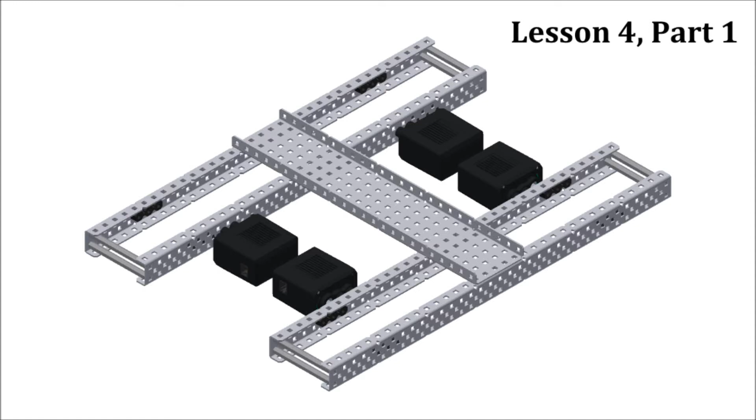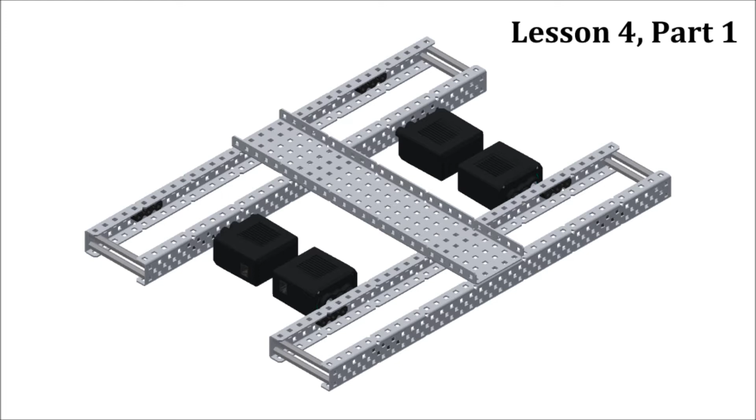Today we will be going over inserting bearing flats, motors, and axles. We will be primarily using the insert constraint along with a few mates, both of which were covered in previous videos. For reference, on screen right now is what your chassis should look like once you're done with this video.

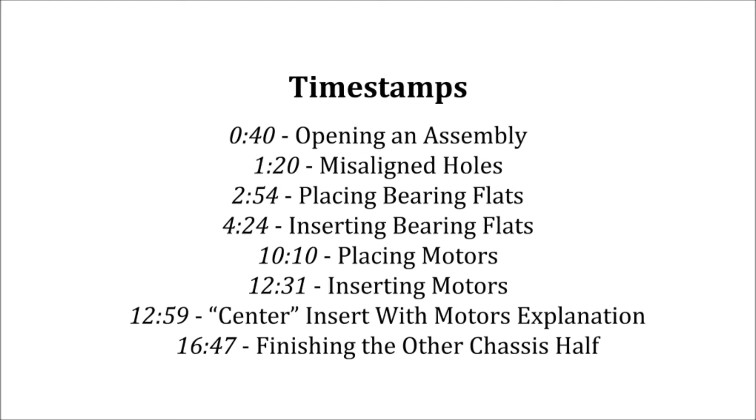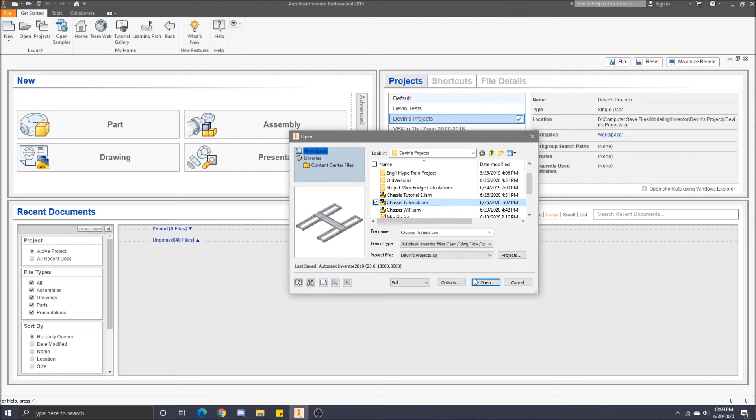Okay, so the first thing that we want to do is we want to open up the assembly that we made in the last two videos. If you remember how to do that, you can pause and do it right now. Okay, since we've gone over this many times before, I'll go through this quickly. But you go to the top left, press open. You navigate to where your chassis is. Mine is chassis tutorial.iam. And once you're done with that, simply press open.

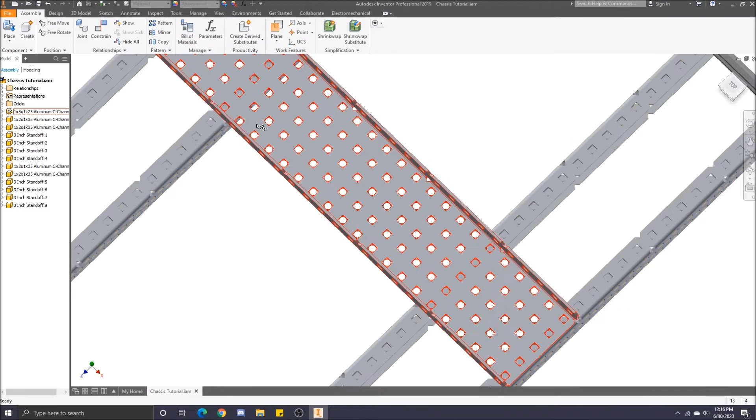And once your chassis opens, it should look something like this. So before we start adding any hardware to our chassis, I'm just going to go over a small little issue that you may or may not have noticed. So if you zoom in to where the inner C channel connects with the center 5 wide C channel, you'll notice that the holes actually don't align. In real life, these would align probably perfectly.

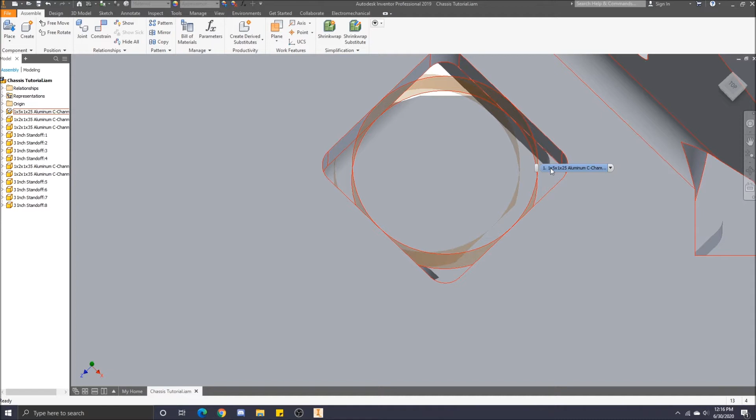However, in CAD, because we don't have wiggle room and imperfect tolerances, the exact dimensions don't add up to line up with the holes. In real life, this would be fine because screws have wiggle room and the parts aren't created perfectly anyway. But because this is CAD and everything is perfectly dimensioned, we will get these little offsets.

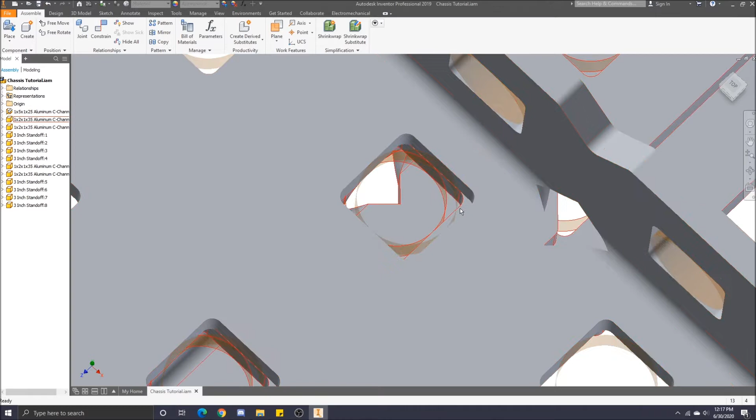Just kind of as a rule of thumb, if it looks like you could theoretically insert a screw in it and it's not too offset, it means you're good and you can put a screw through it. However, if this were like covering half the hole, then that's something you have to watch out for and you probably can't put a screw in it. But for this case, because they're almost close enough, it's okay. Now that that issue is out of the way, we can move on to continuing our CAD model.

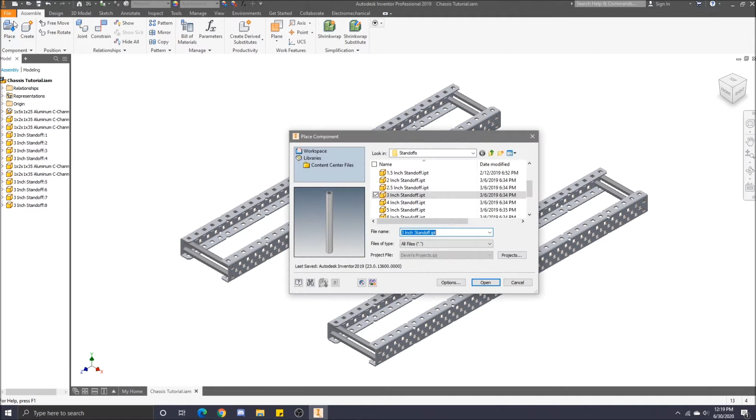The next thing we're going to do is place down 4 bearing flats. Since you should be accustomed to placing parts, I won't go over it slowly, and if you are comfortable with navigating the part library, I'd encourage you to find the bearing flats right now. I'll pause shortly so you can pause the video and search for 4 bearing flats. Okay, so as usual, we will navigate to the place button in the top left, press it, and we will navigate outside of the standoffs folder and outside of the structure folder. So we are back in the Devin Ho's part library folder as seen on the top.

And because this is an axle part that is used with motion, we will go under motion, and then we will look under shaft hardware because this is hardware that you use on the shafts. And then it should be the third thing on screen, bearing flat. Just click that, press open, and then we're going to click 4 times in an empty area to place down 4 bearing flats, and then press escape.

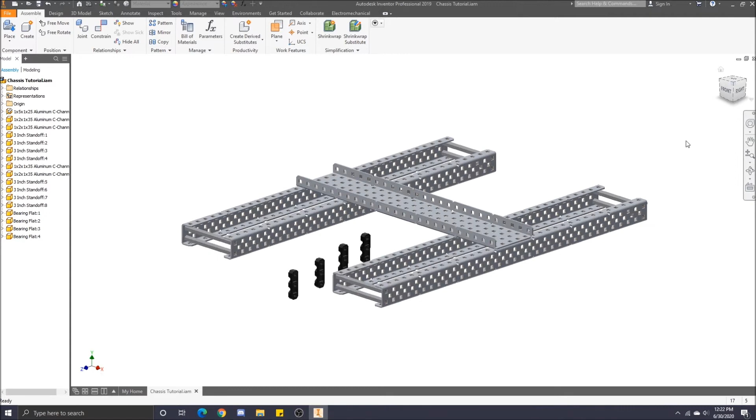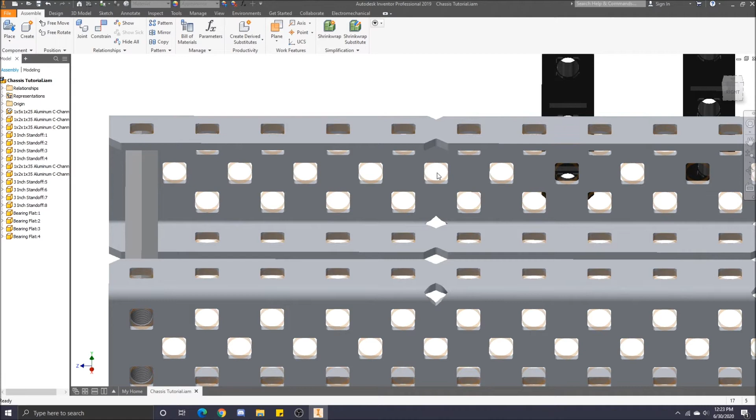Okay, so the next thing that we are going to do is we are going to insert the bearing flats onto the C channel. So we want these bearing flats to go on the inside part of the C on the 5th hole from the middle. So in other words, let me just move my camera. We want the bearing flats to start on this hole that I'm circling right now, or the 1, 2, 3, 4, 5th hole. And then it'll extend to the 6th and the 7th hole, relative to the left. It'll be the same on the right, except you're going from the right.

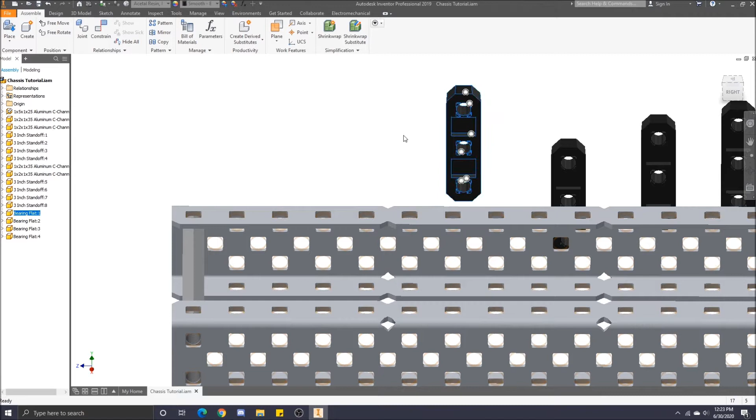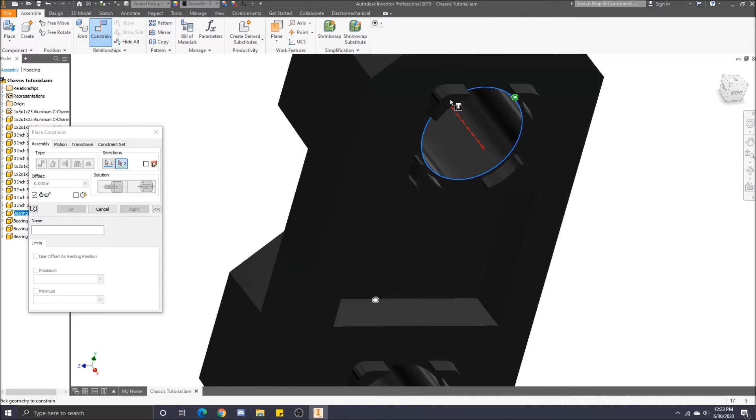So just like standoffs, bearing flats have iMates. So it's the exact same process as the standoffs. What you need to do is you need to click the bearing flat, go to constrain, again select the insert tool. We will select the correct iMate. Make sure that it's the one on the correct side of the bearing flat. In this case, it should have these little 4 notches that go into the C channel. And then we select the correct edge on the work feature. It'll snap in place, and then you press OK.

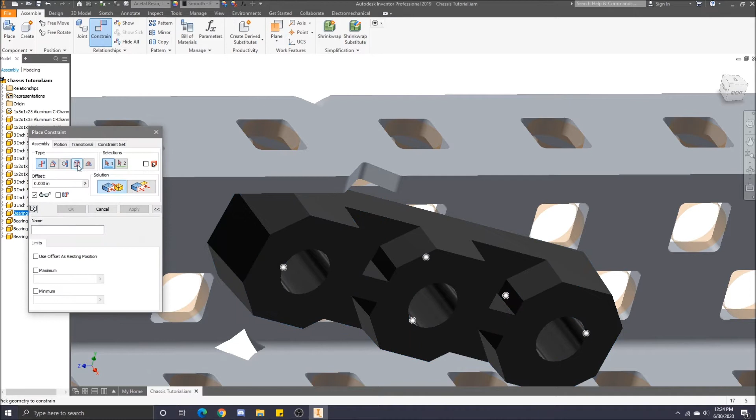And then I'm just gonna move this over so I can repeat the process again. I'll zoom into the location, press the bearing flat, press constrain, insert. I'll select the correct iMate and select the work feature and press OK. And there we have it. We have our first bearing flat.

So with the remaining bearing flats, they will go in the exact same position relative to their edges. In other words, they will go on the 5th, 6th, and 7th hole from the left or the right, depending on which side of the chassis you are. If you are comfortable with inserting the bearing flats, you can pause the video right now and try it for yourself.

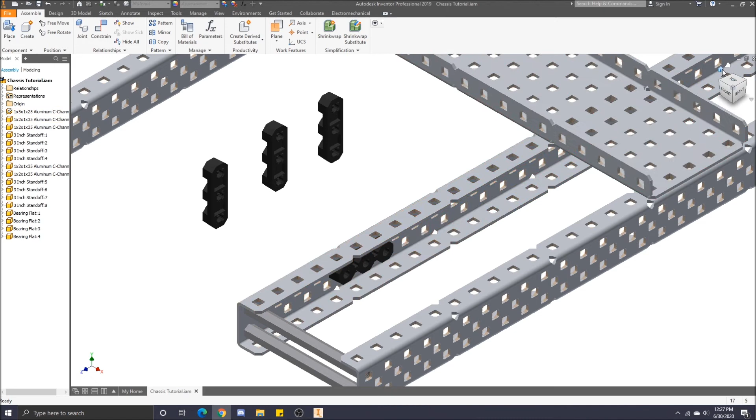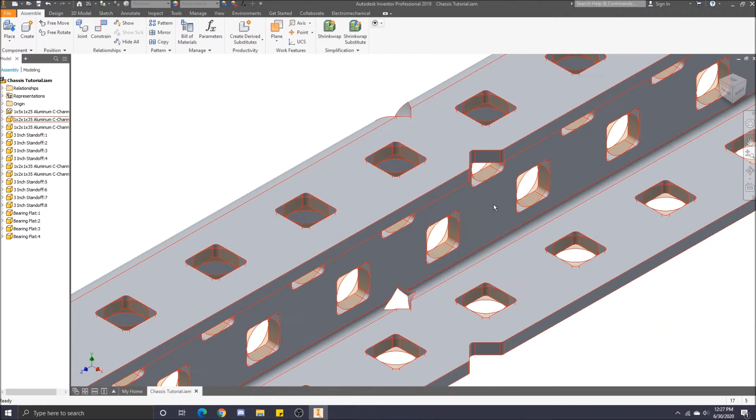Okay, so to insert the other bearing flats, I'm going to start with this C channel. So the first thing I'm going to do is press the home button and then click and drag these to the other side just so it's easier for me to see. And then once we do that, I'm going to hover my mouse over the location I want to zoom in onto and then just zoom into the location. And then I'll slightly adjust my camera angle with the cube, and I have to zoom out again because it's too close. And then I'll just pan a little bit so I can see things better.

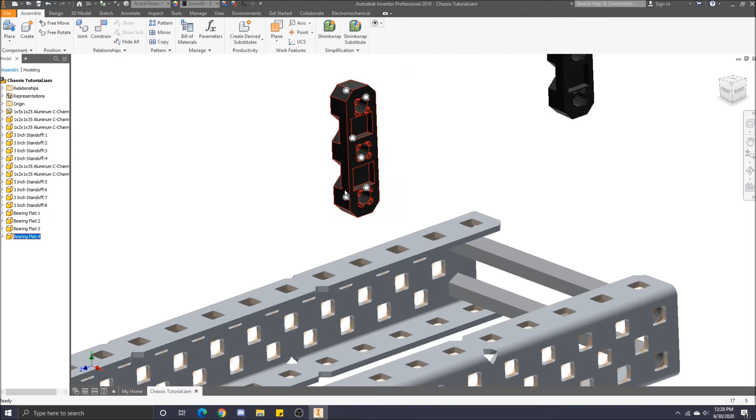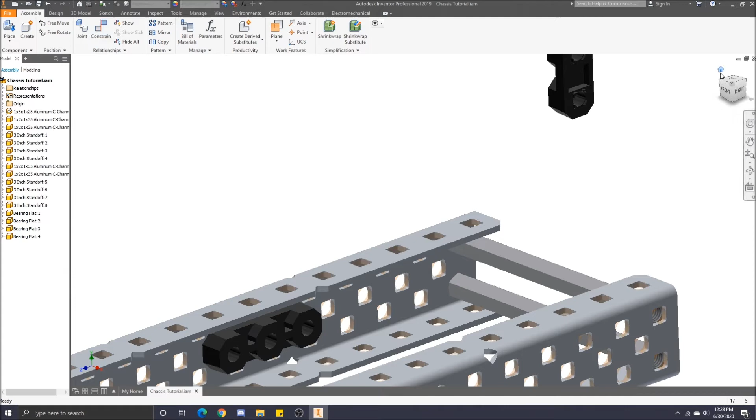And once again, it's the same process. You click the bearing flat, click constrain, click insert, select the iMate, select the correct hole, and then press OK. And we're going to do this again. We're going to select the bearing flat, press constrain, insert, iMate, work feature. OK. And then repeat the process with the other ones. And make sure it's on the correct hole. Again, see from the right side, 1, 2, 3, 4, number 5, number 6, number 7.

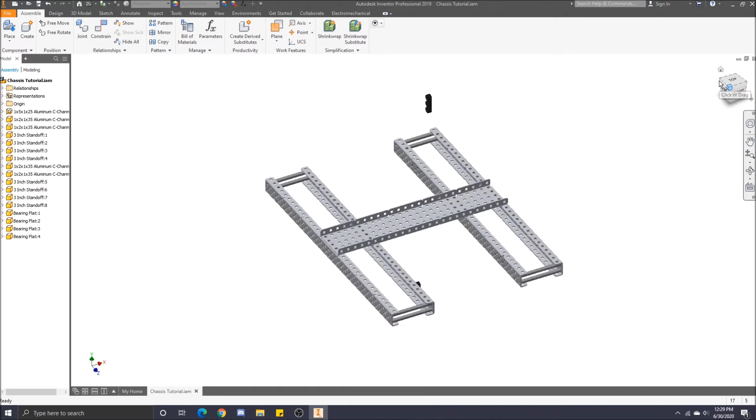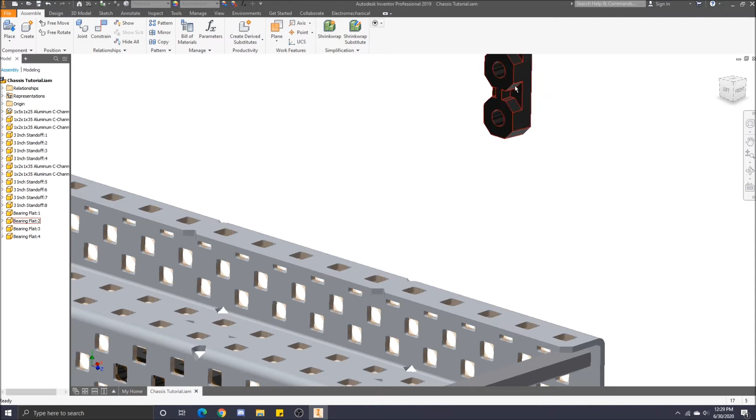So I'm going to go back to home. I'm going to use the cube to go to the other corner. I'm going to click and drag this bearing flat into a better location. I will zoom in to the location, readjust my camera, pan a little bit, and zoom out to see everything. Press escape, and once again, click the bearing flat, constrain, insert, iMate, C channel. Okay. Bearing flat, constrain, insert, iMate, C channel.

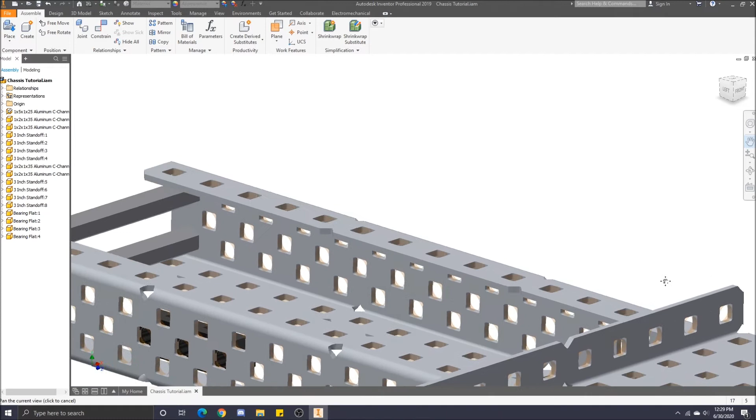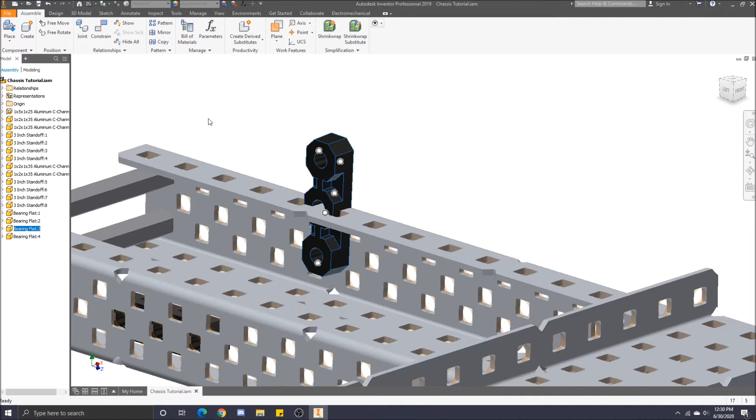Okay. And then same with the other side, I'm just using the pan tool to get to the other side. Going to click the bearing flat, constrain, insert, iMate, C channel. Okay. This time I'm just gonna rotate this so I can see it and pan the camera once again. Bearing flat, constrain, insert, iMate, C channel. Okay. And there we have it. We have the 4 bearing flats in place.

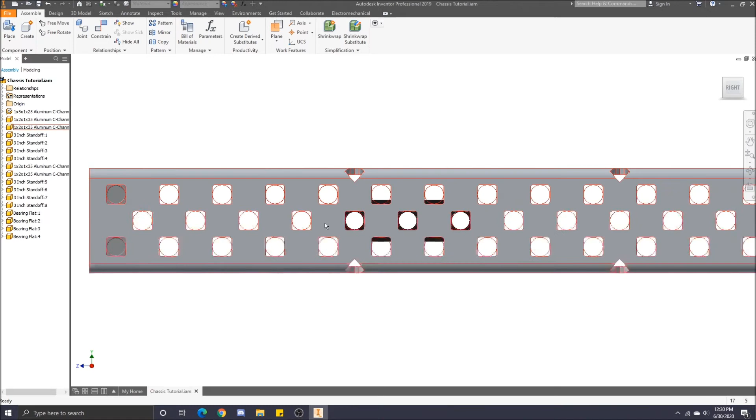I'm just going to go to the right side and just check to make sure they are on the 5th hole in the center. 1, 2, 3, 4, 5, and that's both of them. Going to the other side. 1, 2, 3, 4, 5, and that's both of them, and that is correct. So I go back to home, and we are ready to move on to the next step.

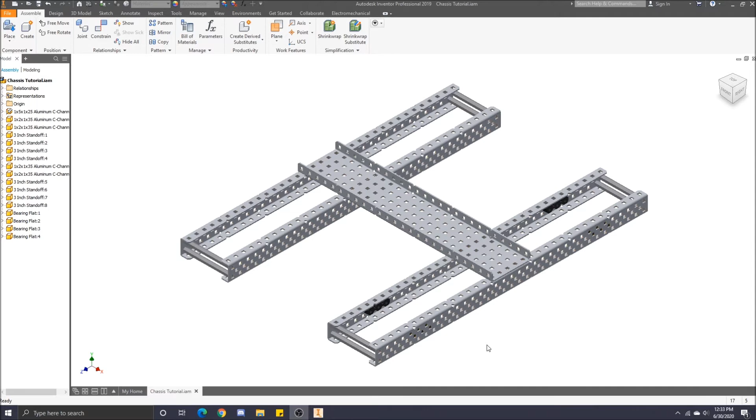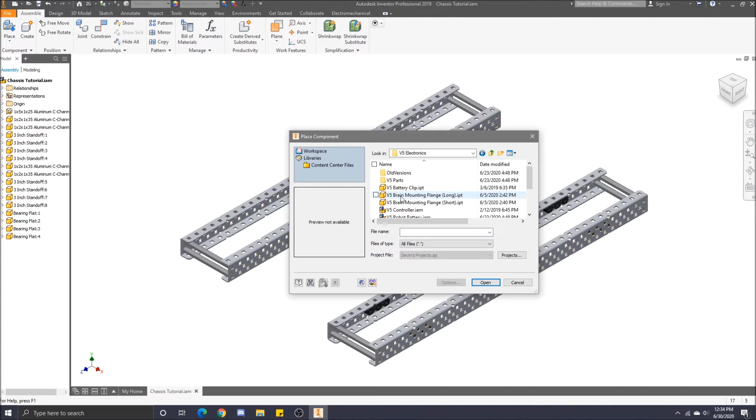Okay, so the next thing we are going to do is insert two V5 smart motors into our assembly. If you remember how to place parts and are comfortable with navigating the part library, please pause right now and do it for yourself. Okay, so once again, we are going to go to place. We are in shaft hardware, so we actually want to go out of shaft hardware and out of motion. If you scroll down, within the VEX part library, there's a folder specifically for V5 electronics. Go into it, and then if you scroll down, there is a V5 smart motor towards the middle, the bottom.

Click it, press open, select two places on the screen. I'm going to put it right here near the front and right here near the back so I don't have to drag it. Once I'm done, press escape, and we have the V5 motors in our assembly. So if you noticed when clicking the motors, you will have seen some iMates. Yes, there are a lot of iMates in this CAD library, so this should be easy for you.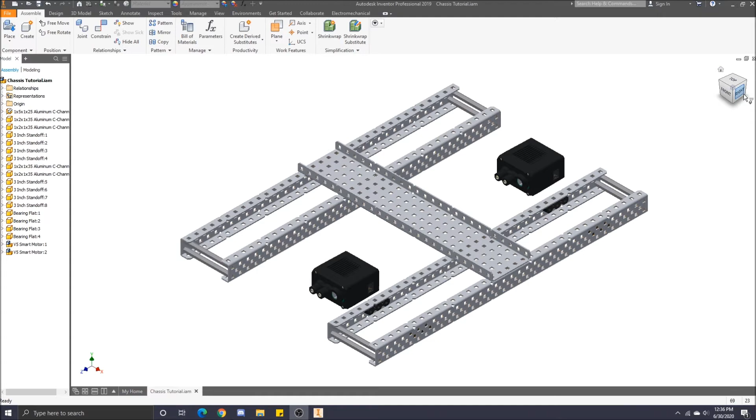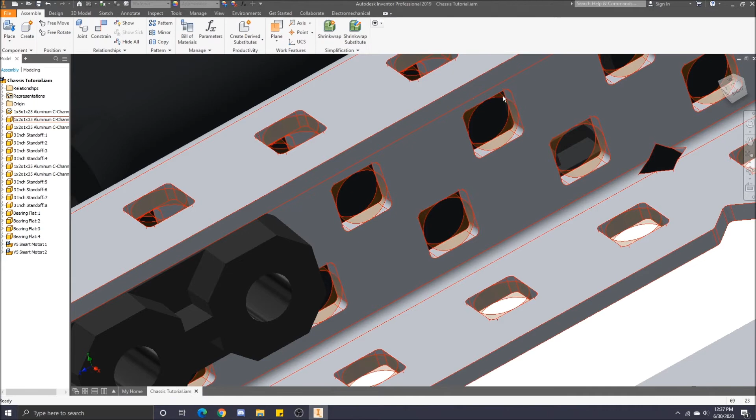So in this case, we want the motors to be inserted on the 8th and 9th hole of the C channel. So remember, the bearing flat is on the 5th, 6th, 7th. We want these two prongs to be on the 8th hole that I'm circling right now and the 9th hole that I'm circling right now. However, we also want to make sure that the axle is going through the bearing flat. So we will have to strategically insert these together. If you are comfortable with inserting and creating iMates, you can pause the video right now and do it for yourself.

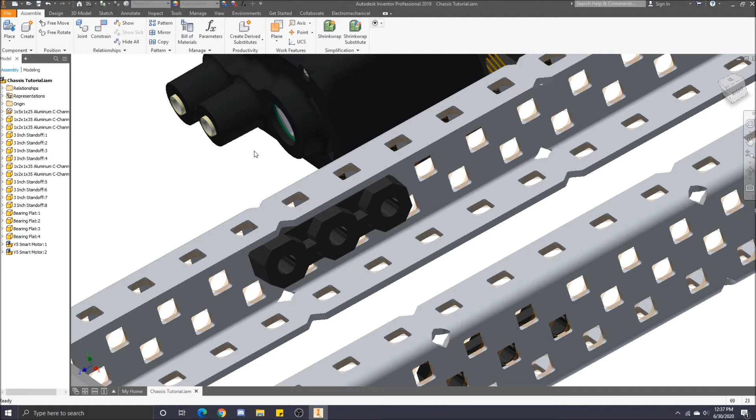Okay, so what we're going to do, just like the bearing flats and the standoffs, is we are going to click the motor. You will see that the two iMates appear. Press constrain. The first thing we are going to do is we are going to insert the middle, in quotes, the middle prong. The reason I call this the middle is because it's in between the axle hole and the other insert. This means that we can use this as like the center point and then rotate the motor around it. So in this case, I want to put it on the 8th hole.

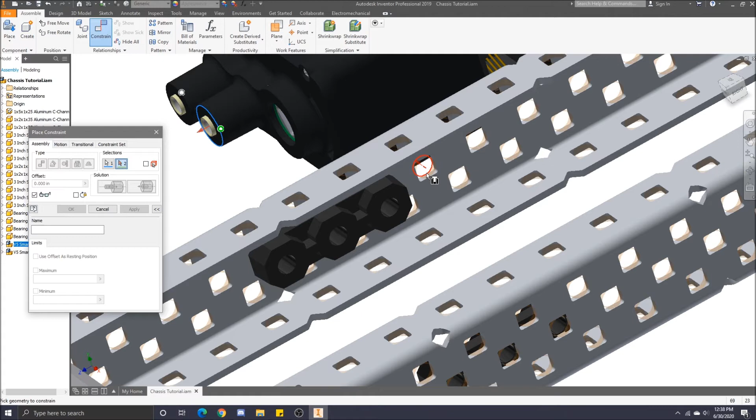Make sure I select the right side of the C channel, or the one that's facing out. Click it, and then press OK. So you'll notice that because I selected the center insert on the motor, I can now rotate the other insert into the correct location and the axle hole into the correct location.

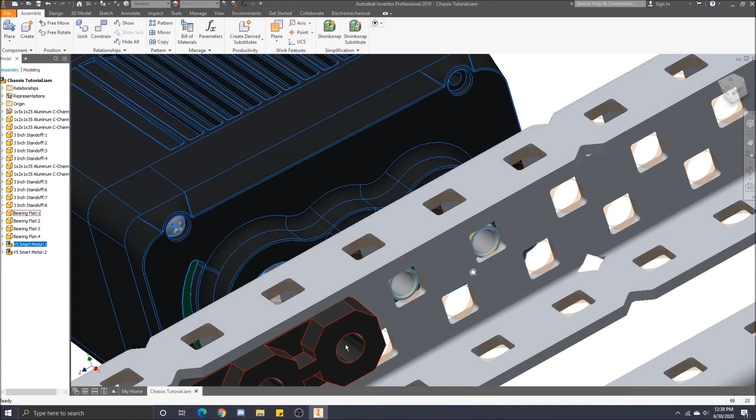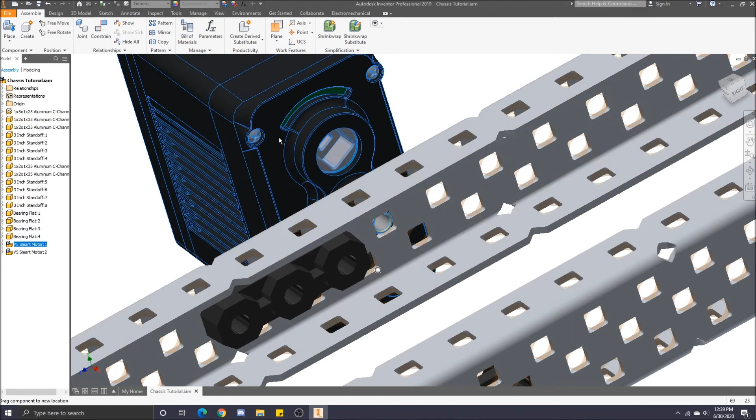When inserting motors, because we know that motors are 3 holes wide in terms of the axles and the inserts, if we get the center correct, if, like how it was last time, the axle is in the incorrect location, we can just pivot around the center because it's the center. Which is why whenever I'm inserting motors, I always start with the middle.

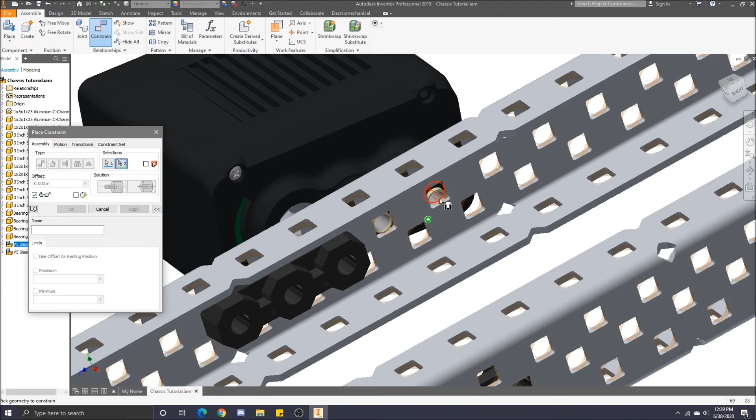So once we get that, we are going to click the motor again to make the iMate show up. Gonna press constrain again, gonna press insert, press the iMate, and then select the correct edge on the C channel, and press OK. And then you should notice, if you move around, that the motor is inserted into the correct holes, and the axle is indeed going through the bearing flat.

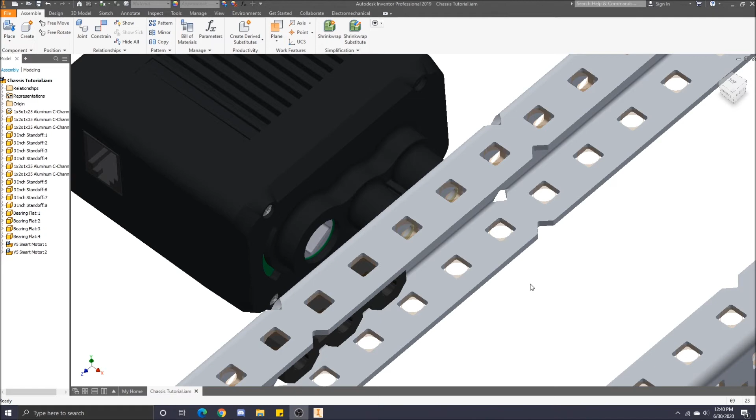So, please pause here and try and do this on the other side. I will go over it, but for practice, please do it yourself. Okay, so the first thing I always like to do is press the home button just to reset my view to make everything easier. Then I'll hover over the area I want to go to, zoom in, and then I'll just slightly adjust my camera, drag the motor down a little bit so I can see it, and then use the pan tool to go down.

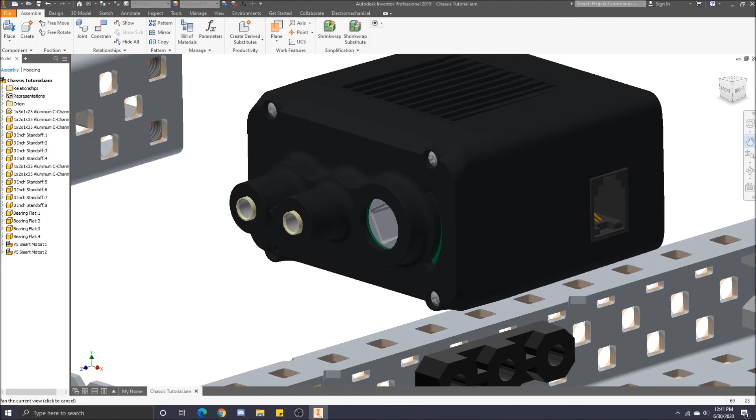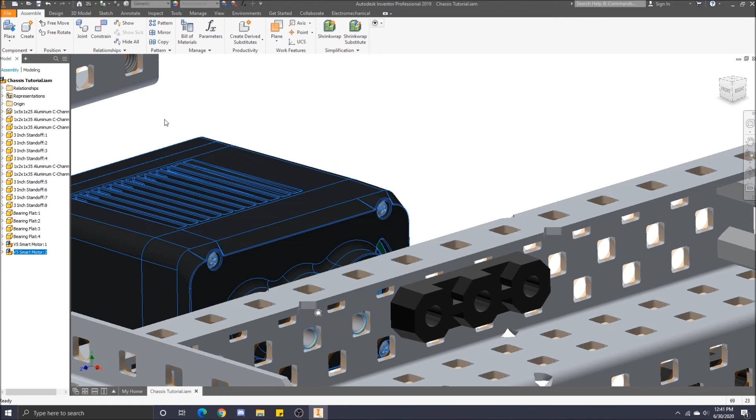Then I'm gonna click the motor, press constrain, press insert, select the middle insert, then select the correct side of the C channel work feature, press it, press OK. In this case, it teleported to the correct location, so we don't have to do any rotating. So just select the motor, constrain, insert, iMate, and then zoom in closely. And because the motor's covering, you'll have to kind of fiddle around with your mouse until you see the correct edge and the arrow pointing towards the motor.

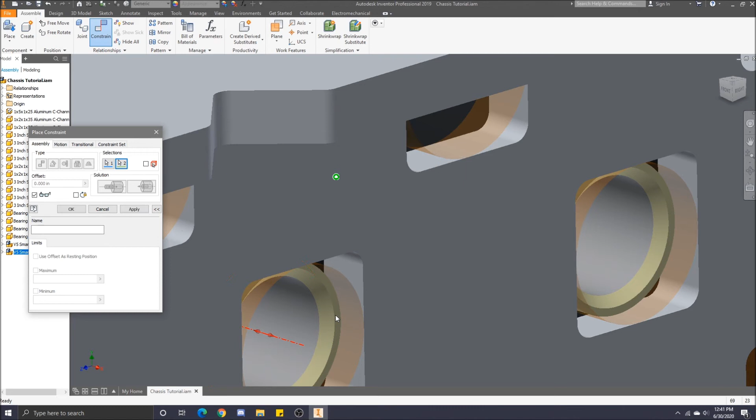Click it, press OK, and I will go back to home, quickly try and wiggle the motors to make sure they're stationary, and there we have it. We have our motors connected.

Okay, so the next thing we are going to do is repeat this same exact process on the left side of the chassis. So if you are still uncomfortable with CAD and you still feel like you need help, just rewind the video to when I start placing the bearing flats again, because just like the last video, the sides are identical. So you can rewind the video now if you need to rewatch it for help.

If you don't need help, then I would encourage you to try and do the left side of the chassis on your own, and then check with the video and images to make sure you're doing it right. I will do this silently just so you can see my process of CADing and how fast I would usually go. So I will just begin CADing right now.

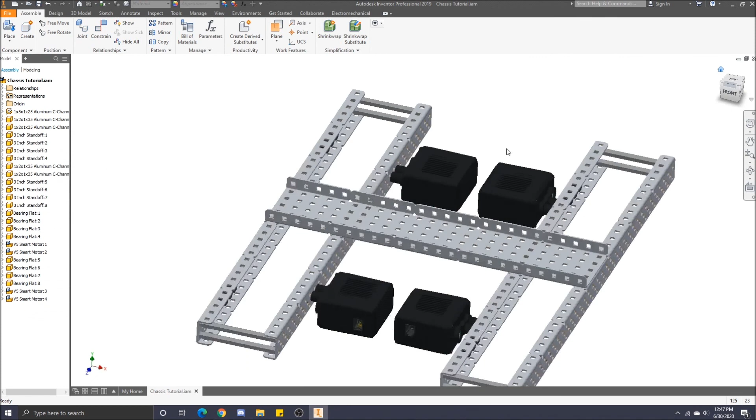Okay, and once you're done, make sure to save your work. Please, please save your work more often than I have been doing it. Just go to the top left and press save, or if you like keyboard shortcuts, you can press and hold Control S.

So this will be the end of part 1 of this video. In the next video, we will be inserting the axles in 2 different methods. And don't worry, if you're tired of iMates and inserts, next video will not have any iMates or inserts.